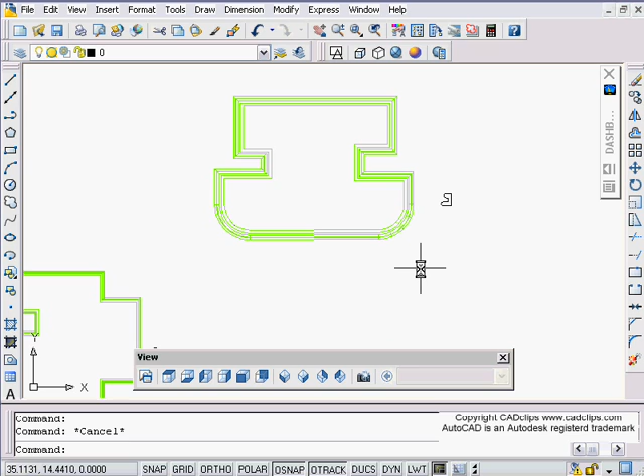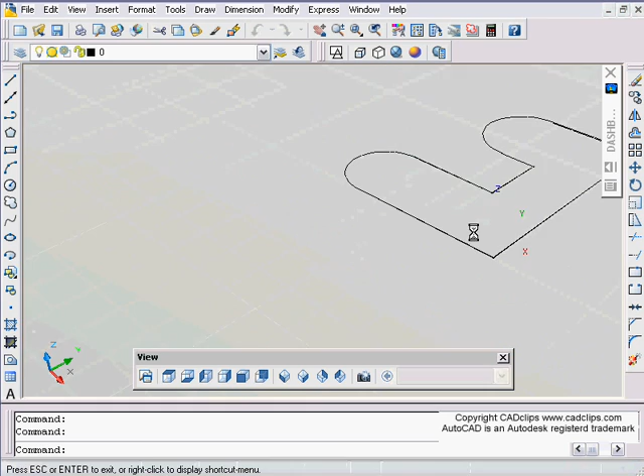So I've got the completed project here. I'm just going to switch over into a different mode to make it look nice. What we can do is take a profile, just a closed polyline like this. We can take that shape and sweep it along an edge of a solid, like over here, and we end up with something that looks like this.

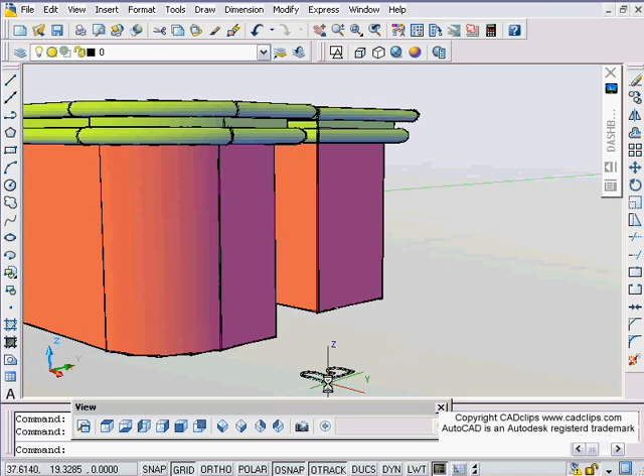I'm going to do a shift middle mouse button, pan over. So there we see we can take - I'm going to use my control button to bury that down there and not have it dock. There's the profile, here's the solid, and there's the sweep. Now the key here is where your base point is on your profile of your polyline, and we're also going to draw a polyline around the top edge of this object, and the direction the polyline goes is significant. You'll see there's a bit of trial and error.

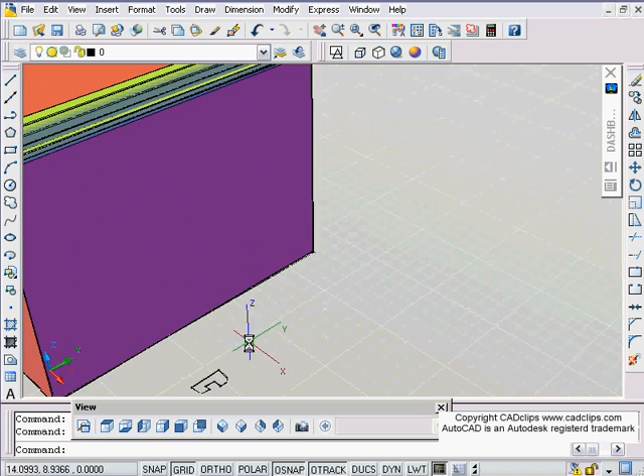Over here I've done the same type of thing where I've taken this shape and swept it along the edge of this object, and I end up with that type of effect. Shift middle mouse button over there. So all different ways that we can do this.

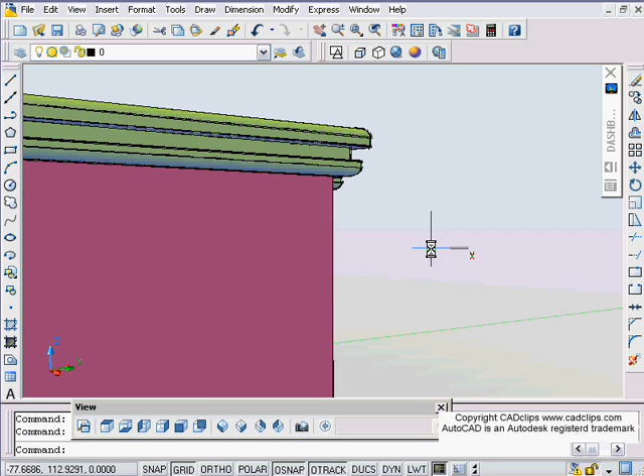I'm going to go back here to a top view, and what I'm going to do is take and move this. Now I have a polyline that's underneath there. I'm going to say M for move and use shift space bar to toggle between. Oh, that didn't do it. I thought I had a polyline under there, but apparently I don't, so that's not a problem.

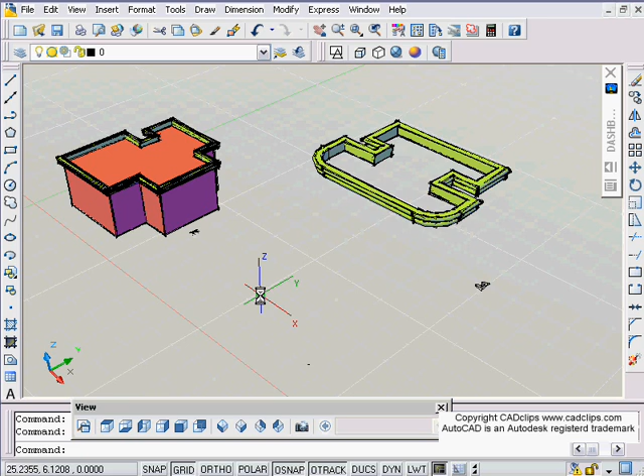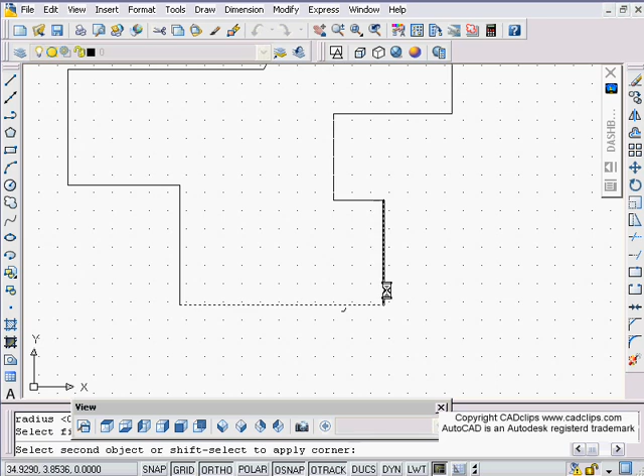So I'll draw a new one. I'm going to go back to wireframe and top view here, and just draw some lines. I'm going to go line, to start from scratch, doesn't matter. And then maybe I'm going to go in here and say fillet radius 1. Radius that, maybe fillet this, give it a bit of style.

And then what I'm going to do is take these and join them into one polyline. So I'm going to use my P edit and grab this and join all of these up and hit enter, enter. Now I have a closed polyline.

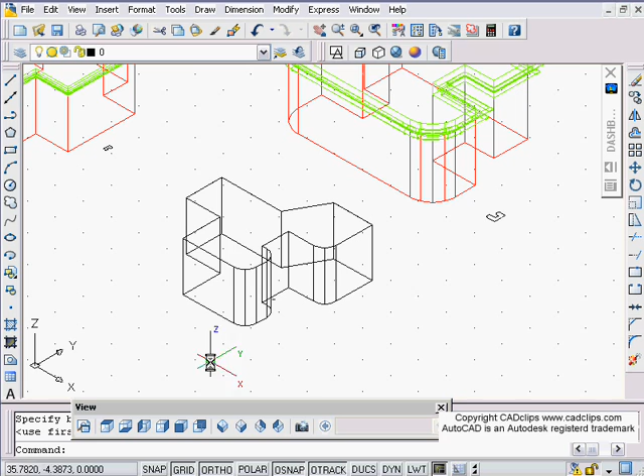Now I've also got that polyline there. I'm going to take this polyline and move it from the end point of there up to there. Now remember, I kind of drew that polyline in this direction, and sometimes you have to play with the direction of the polyline itself. But there is now a polyline up there.

So I can take any - this is again just a closed polyline, doesn't matter where it is located in plan - and I'm going to go in now and sweep that along the edge using that polyline. If I wanted, I could erase this and redraw my polyline. It doesn't matter, as long as you have an edge, a polyline along that edge.

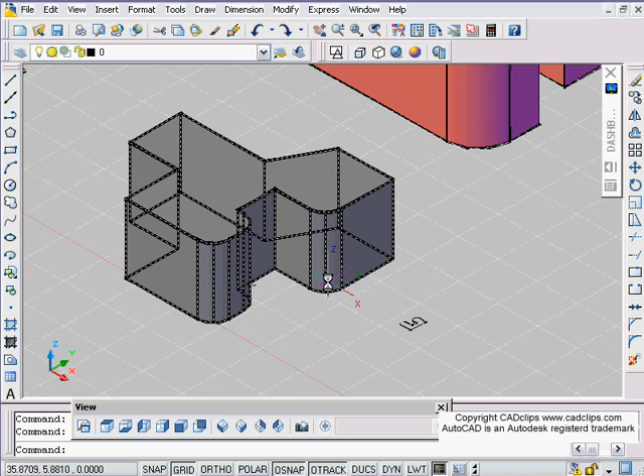And the next thing I usually do is give this a little bit of color or something like that, just for the heck of it, make it show up a little nicer. Maybe go with the blue. Close that off. Maybe I'm going to put myself on a different layer, so then when that sweep gets created, it comes in on a different layer and a different color.

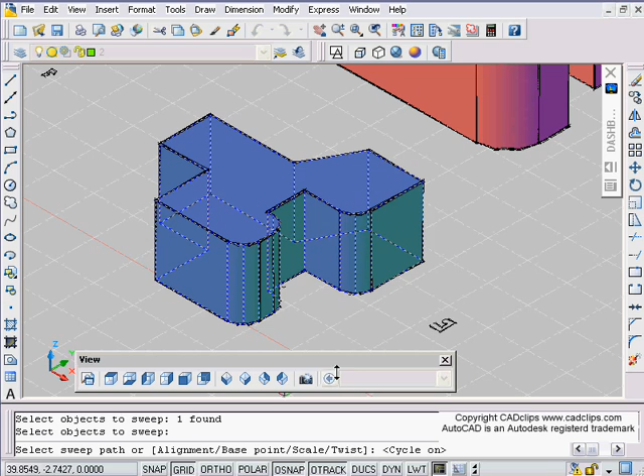So now what I'm going to do is go up to here and use my sweep tool. Sweep. It's going to say select an object to sweep. So I'm going to pick on here and hit enter. Select the path. I'm going to hover over here and use my shift space bar to toggle, object cycle to get the right object. I hit enter and it sweeps that object around there.

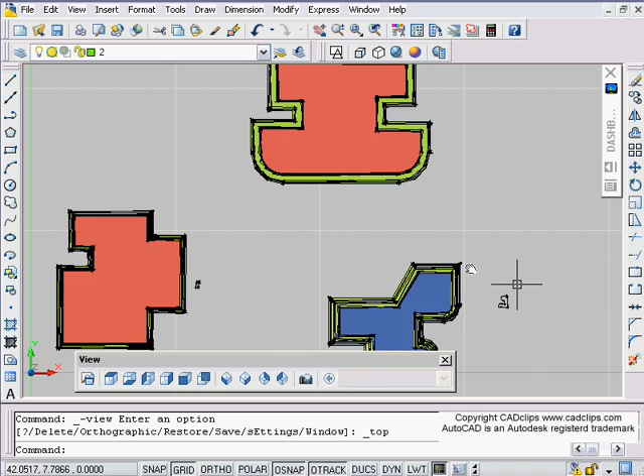And that's really it. The only thing is you might not get the result you want right away because of the way this object is drawn and the direction of the polyline. If we go back to our top view, you might try experimenting by maybe mirroring this over here and then erasing this guy, and then try and see what your result will be in this case.

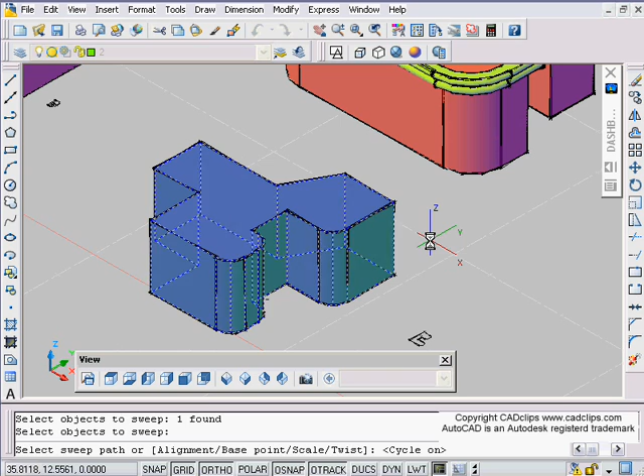Let's erase this. Let's do another sweep. Here, enter, shift spacebar to toggle, enter, and notice that it swept it, but it swept it on the wrong side - going on the wrong side. Now maybe that's what you wanted.

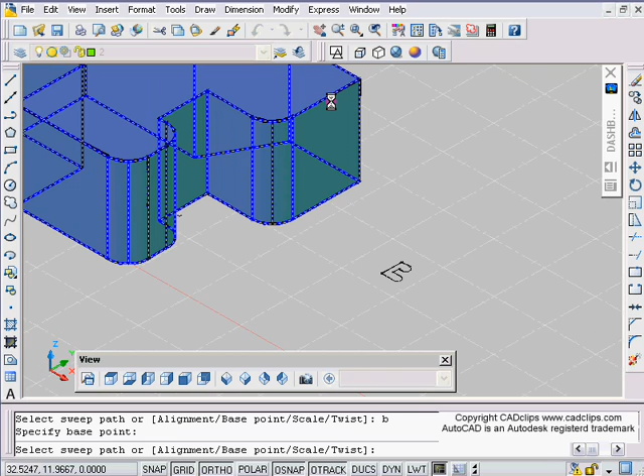The other option, of course, is to play with your base point command. Do a sweep, pick this, enter, and then type B for base point, and maybe make this be the base point, and then shift spacebar to toggle through, enter, and you might get a different result because I've moved my base point.

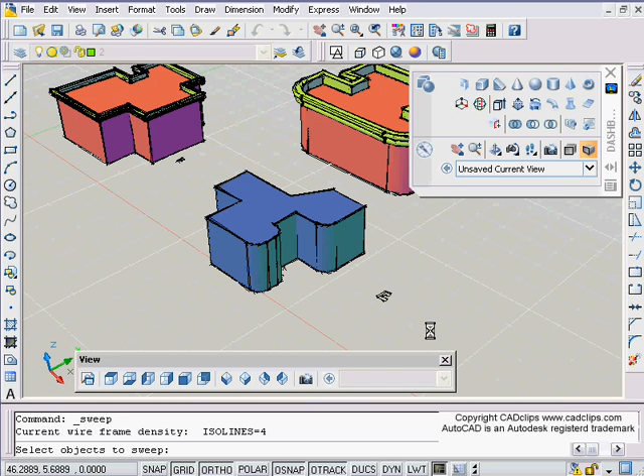So base point when you do this - going to go in perspective mode here and kind of look neat. So when you do your sweep, make sure you have a polyline. It doesn't have to be closed as long as you have a polyline along the edge. And when you go to sweep that object, you can use your base point option. You can scale and twist and maybe go review - we have a separate CADclip just on the sweep tool itself.

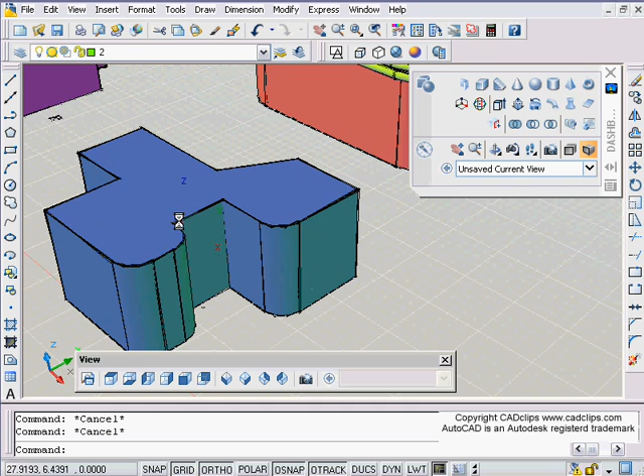But the key here, any solid object, all you have to do is trace around it with a polyline and then sweep your closed polyline profile around that using base point. And that's about it. You end up with a cool kind of parapet effect like this, if that's kind of what you were looking for.